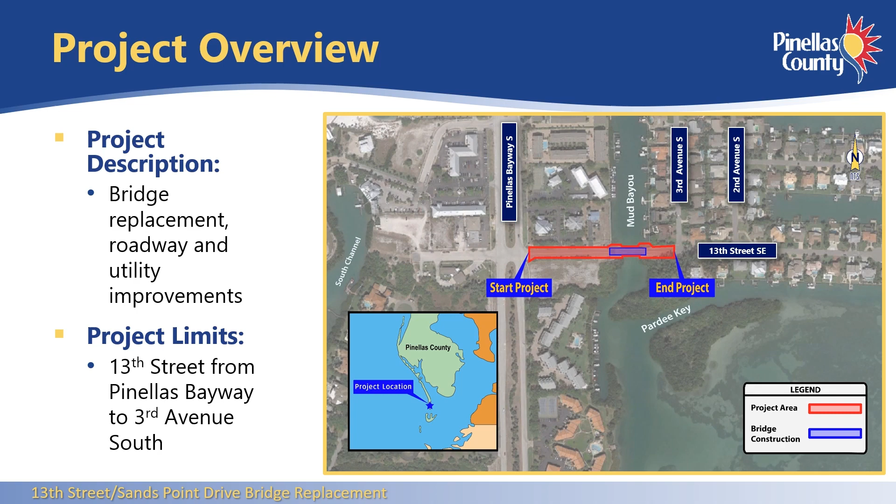The project is located in the Tierra Verde area within Pinellas County. The project limits are approximately 800 feet from the Pinellas Bayway South on the west side to 3rd Avenue South on the east side. The project includes replacing the 13th Street Bridge over Pine Key Cutoff, also known as Mud Bayou, and replacing the existing reclaimed water line on the south side and the water main on the north side.

The existing 13th Street Bridge was constructed in 1957 and serves as the only ingress and egress for the island community of Pardee Key within Tierra Verde. The roadway is currently and will remain posted for 25 miles per hour.

The bridge was originally designed for a 50-year service life. However, the type of design, construction, repairs, and annual maintenance performed by Pinellas County have extended its service life. The bridge evaluation reports conducted by the county in 2018 and 2021 recommend replacement of the bridge.

The bridge has no shoulders and provides barrier-separated sidewalks. Current design criteria requires wider sidewalks and shoulders.

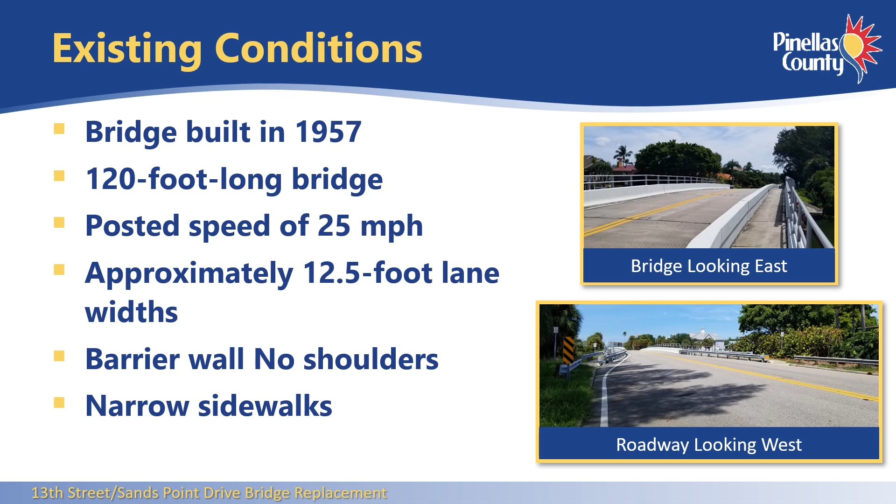The proposed bridge will be longer than the existing bridge to improve water flow through the canal and reduce the potential for scour within the canal. The proposed bridge will also provide greater vertical clearance above the water due to the type of design proposed and to help protect the bridge from water splash from boats and jet skis.

Because the bridge will be higher than the existing bridge, the roadway approaches to the bridge will also be reconstructed. A 6-foot wide sidewalk will be included on both the north and south sides of 13th Street to 3rd Avenue South.

The existing potable water main and reclaimed water main will be replaced as well. Both water lines will be placed under the canal. All improvements will be made within the existing right-of-way.

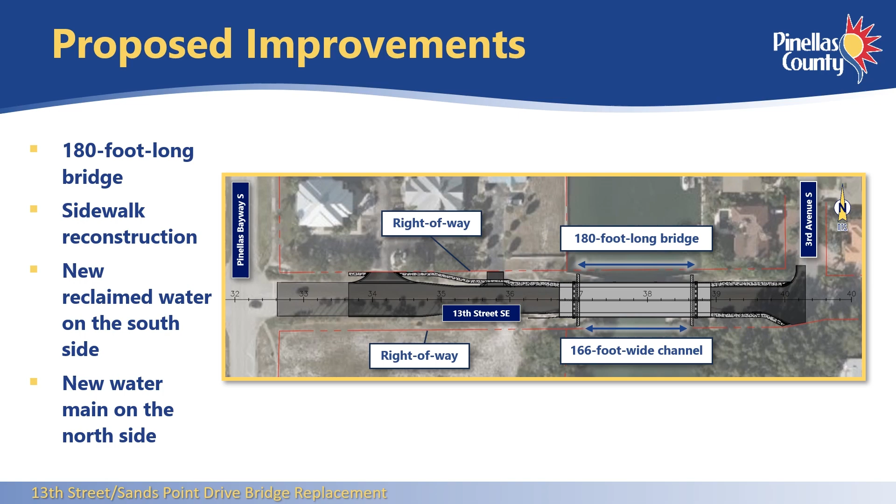The proposed bridge will include two 12-foot travel lanes with minimum 6-foot shoulders and 6-foot wide sidewalks on both sides of the bridge.

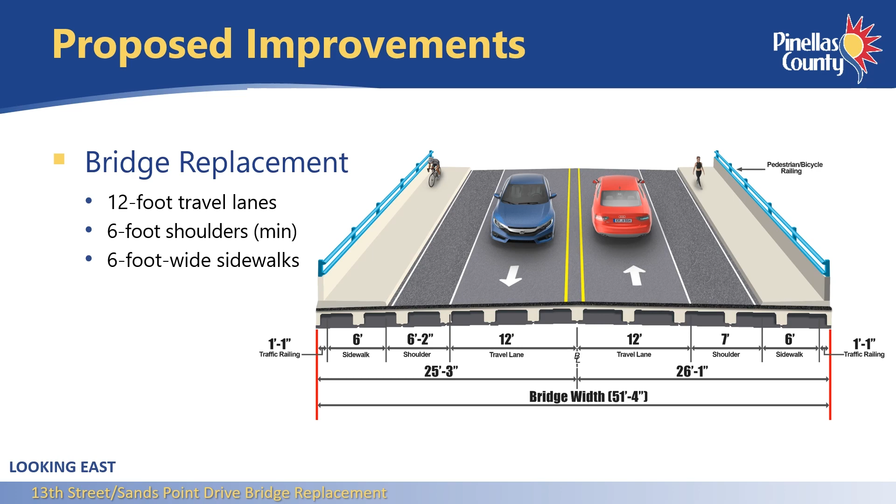As noted earlier, the proposed bridge will increase the navigational clearances by approximately 2 feet. The increased clearance will help protect the underside of the bridge from water spray from boats and jet skis.

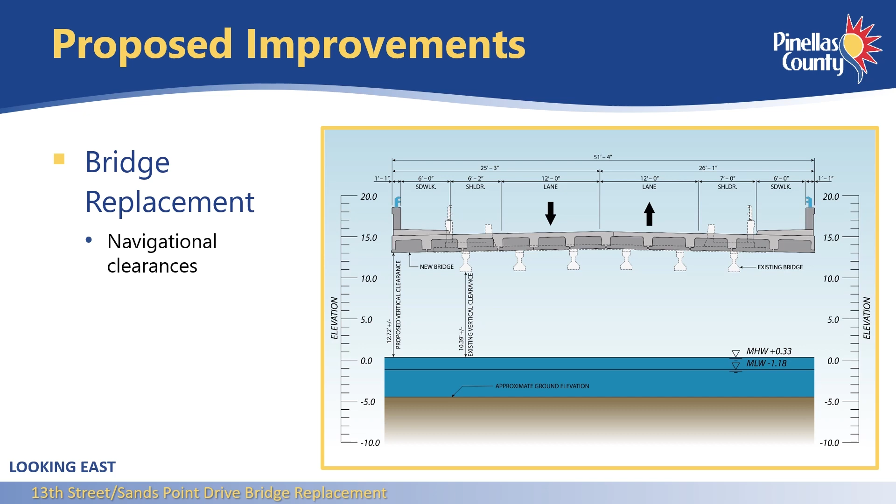The roadway approaches to the bridge will be reconstructed due to the increased height of the bridge. The roadway will consist of two 12-foot lanes, paved shoulders, concrete curb and gutter, and sidewalk along the north side of 13th Street.

The roadway approach east of the bridge will include two 12-foot lanes, paved shoulders, concrete curb and gutter, and sidewalk on both sides of the road from the bridge to 3rd Avenue South.

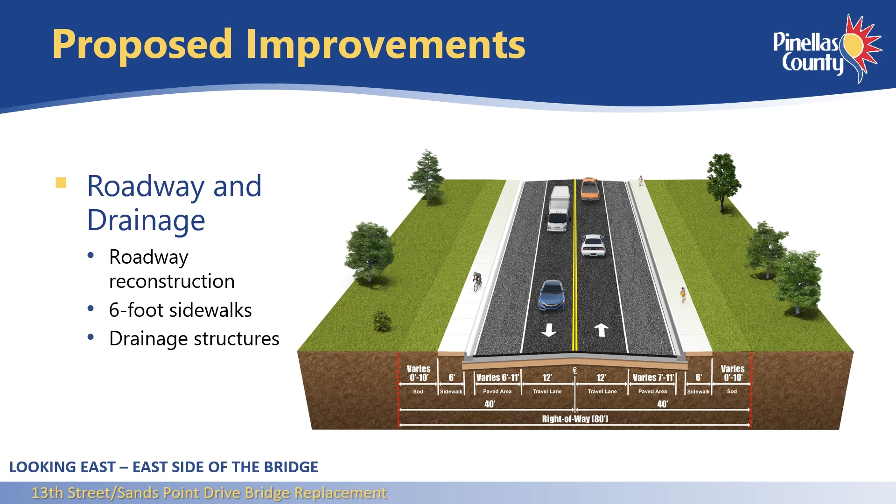Because this is the only access to the community, the project will require phased construction. Initial phases of construction will focus on relocating the existing utilities.

During Phase 1A, the reclaimed water line will be replaced along the south side of 13th Street. The number of travel lanes will not be reduced during this phase, and pedestrians will still be able to use the sidewalk along the north side of 13th Street.

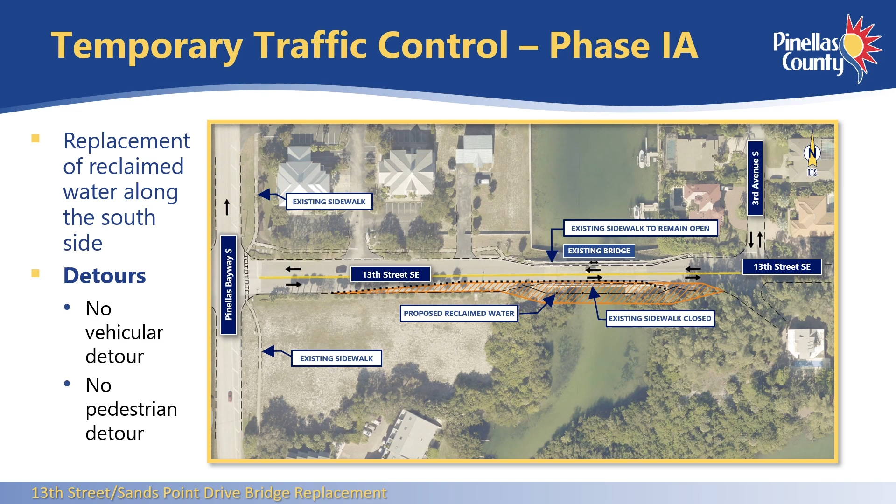During Phase 1B, the existing water main along the north side of 13th Street will be replaced. The number of travel lanes will not change during this phase. However, pedestrians will be detoured to the south side of the bridge. A temporary pedestrian crossing will be provided just west of 3rd Avenue South.

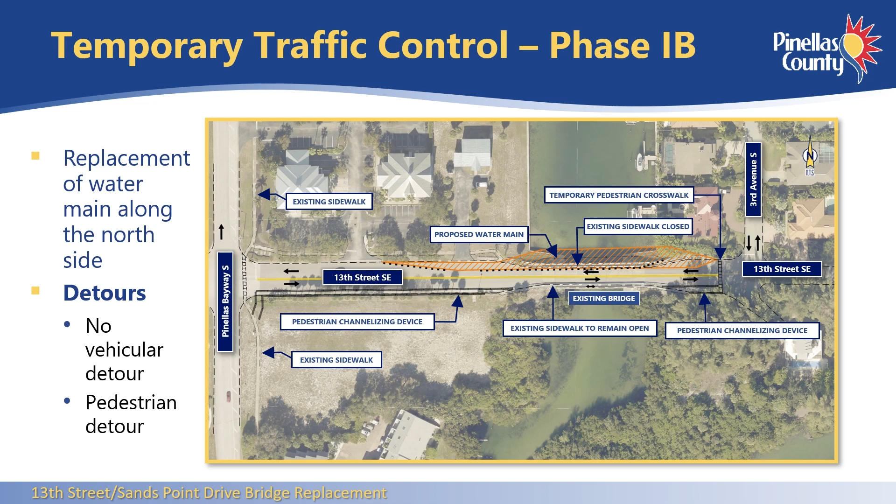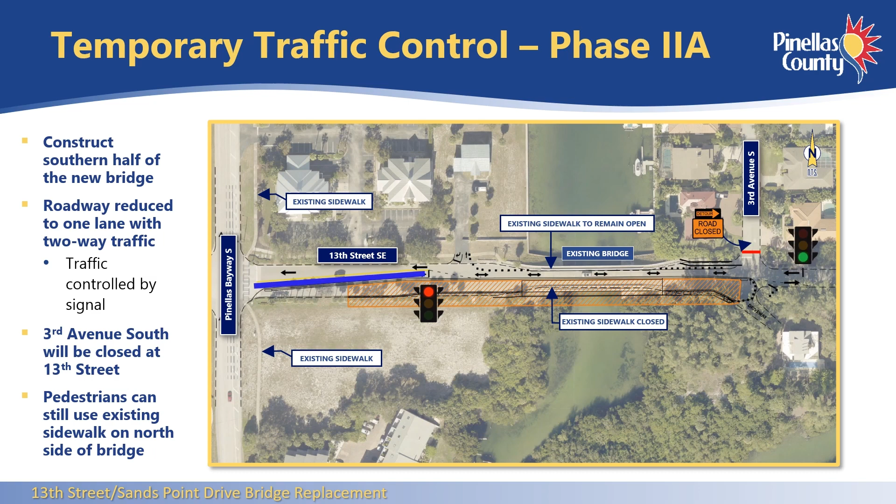During Phase 2A, the intersection at 3rd Avenue South and 13th Street will be closed and a temporary detour will be installed. Residents along 3rd Avenue South will be directed to 11th Street East towards 2nd Avenue South and 13th Street. To access 3rd Avenue South from 13th Street, residents will use 2nd Avenue South towards 11th Street East.

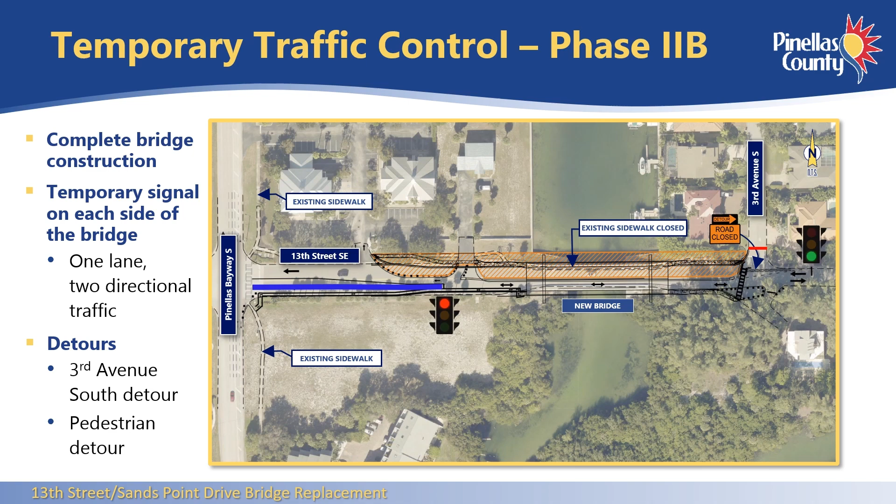During Phase 2B, the intersection at 3rd Avenue South and 13th Street will be closed and a temporary detour will be installed. Residents along 3rd Avenue South will be directed to 11th Street East towards 2nd Avenue South and 13th Street. To access 3rd Avenue South from 13th Street, residents will use 2nd Avenue South towards 11th Street East.

Once the new bridge is completed, traffic will be returned to normal operations. During construction, the county will provide project updates through the Nixle alert system and on the project webpage.